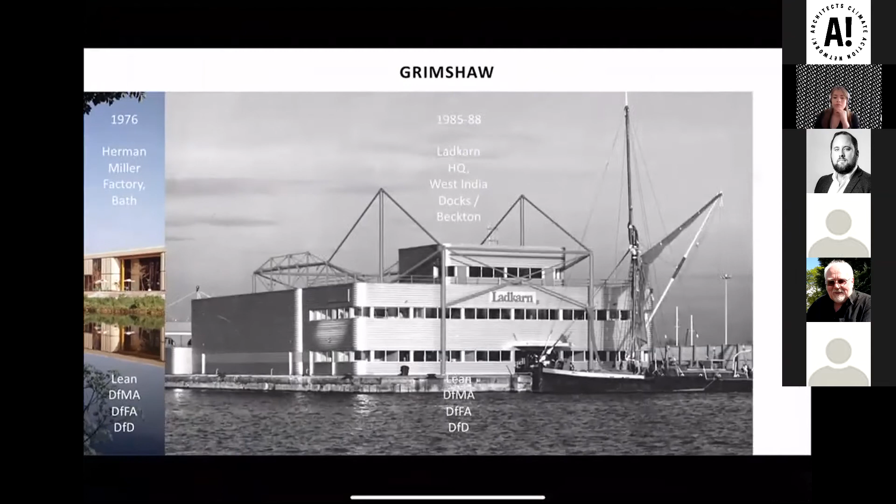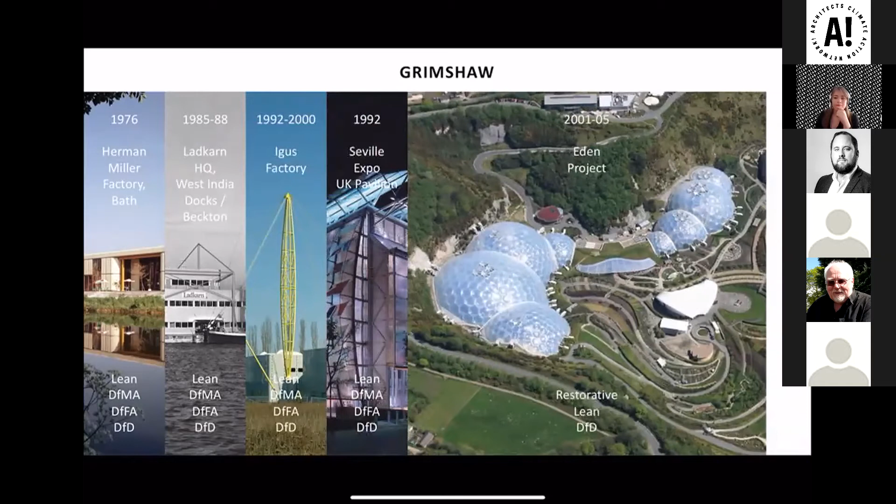We actually have quite a long history of implementing principles which are now highly aligned with circularity throughout the practice's history. Going back to the early days when Nick formed it with Terry Farrell back in the 70s, we started to look at projects that were highly adaptable and flexible. The context at the time was resource efficiency, particularly around things like the energy crisis in the early 70s. That thinking has come back to the fore in the work we do now, particularly in the context of the climate emergency, trying to decarbonise buildings. They're all strategies that lend themselves very well to those sorts of endeavours.

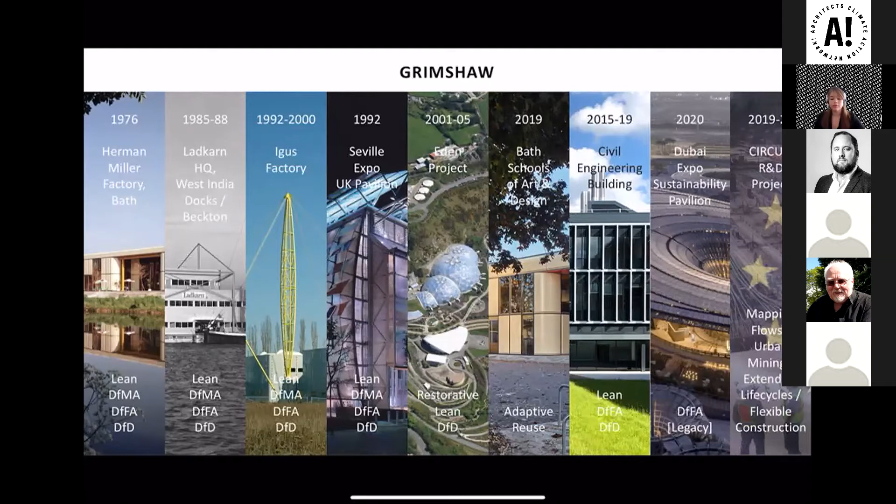So we've got a long history, and we're starting to formalise that knowledge we've gained over the decades, and we're starting to collaborate now in research projects. I've captured four projects, well actually three projects, two of them linked here, which I want to take you through, covering design for flexibility and adaptability, adaptive reuse, design for deconstruction, and urban mining. I'm going to take you through the lessons we've learned and the challenges we face.

So the first project is the Herman Miller factory in Bath, which has recently been converted into the Bath School of Art and Design. Back in 2019, the building opened.

The project was really interesting from the point of view of the journey that Nick has taken with this project, having worked on it originally almost 40 years ago at the beginning of the practice's inception, and seeing all of the strategies and principles around flexibility and hyper adaptability of the building actually being played out in the real world in our modern times. Nick was very involved in this project with Bath Spa, actually helping to guide them through the process of adapting the building.

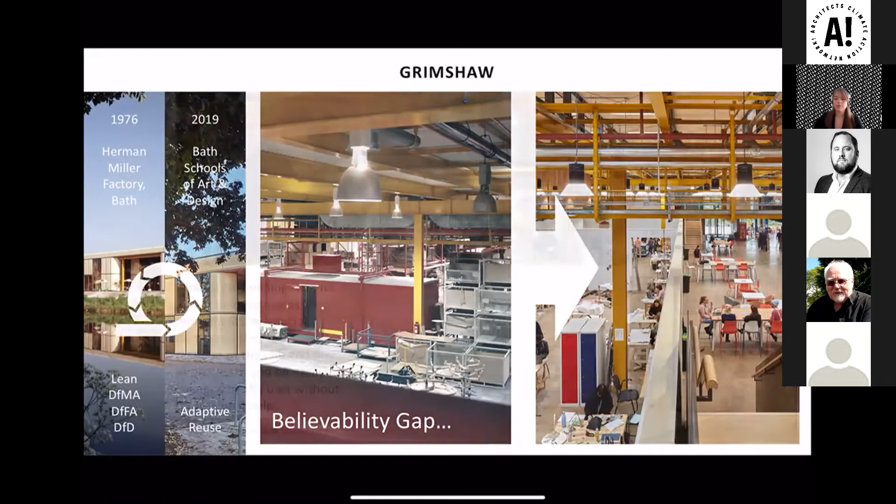One of the first challenges we faced, which wasn't necessarily a construction challenge, but a challenge to actually getting the project off the ground, was what he deemed the believability gap. This was actually convincing the client that this building was the right one for them, and that it was going to enhance what the school was trying to achieve, as opposed to becoming a barrier to what they wanted to do. So he took them back to the first principles of the Herman Miller factory, working with the client there to develop the brief.

Nick was quoted back in 1977 saying industrial buildings can no longer be designed as monuments for special purposes. They must respond to the ebbs and flows of processes and be easily changed by their users without professional help.

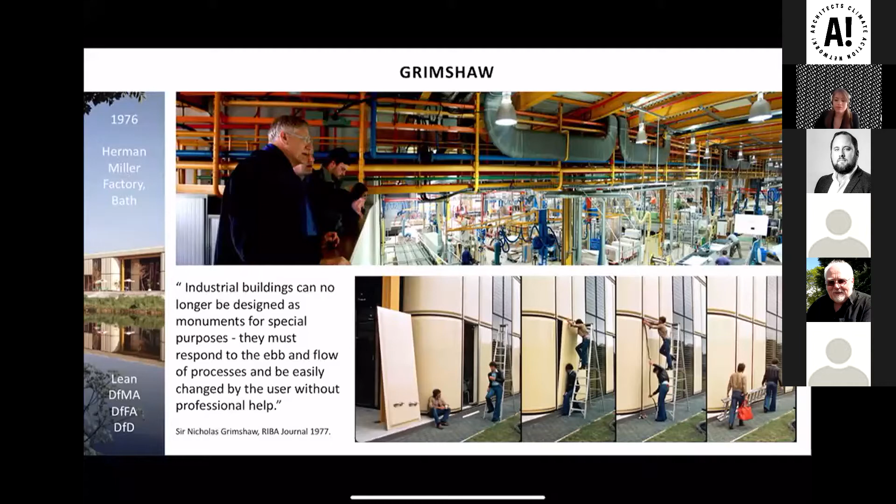You can see some rather kitsch images here of guys in flares back in the 1970s taking panels off the facade of the Herman Miller building over a cup of tea, just to demonstrate the simplicity of the systems involved and the process of swapping panels around at the time. That was really what the client needed to hear to be convinced this was the scheme and building for them to develop.

We've retained the entirety of the structure of the building with some modifications. The primary structure is made of steel. We've elevated the roof using steel trusses that follow the same grid spacing as the original structure.

This has allowed us to do a number of things. We've been able to create a service zone which services an upper deck. Originally, the Herman Miller building was used primarily as a large double height space with offices inserted around the perimeter. This allowed the school to create an actual complete first floor.

By elevating the roof, we've been able to get daylight and servicing all provided from above into this deep plan building. That's really helped us retain the future flexibility of the scheme going into the next 30 to 40 years, even longer.

That was really key to the design of the Bath School of Art and Design, making sure we retained that original premise of the Herman Miller building, which was to maximise the flexibility.

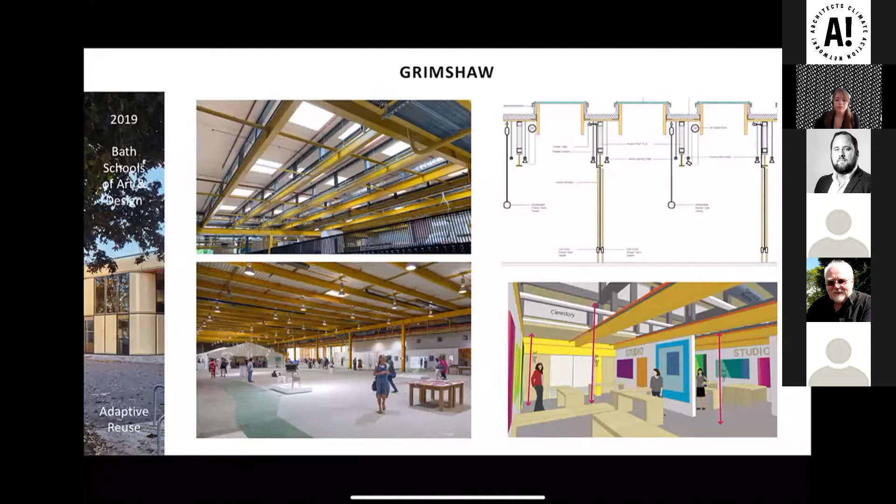One of the other challenging things with the scheme was that it wasn't quite large enough to accommodate the School of Art and Design. So there was a need for a pavilion to be put on top of the building for lecture theatres and some larger collaborative spaces.

In order to achieve this, we decided rather than trying to interface between the old and new structure, to completely separate them. So the pavilion is completely self-supporting. It has a truss structure that penetrates through the roof and goes down into the slab.

We've locally created new pad foundations to support this deck. This simplifies things greatly, in that the only interface between the old and new building is a deflection head that runs along the base of the curtain wall, where the roof deck meets the curtain wall. In terms of challenges and practicality, that really helped drive an efficient solution for the building.

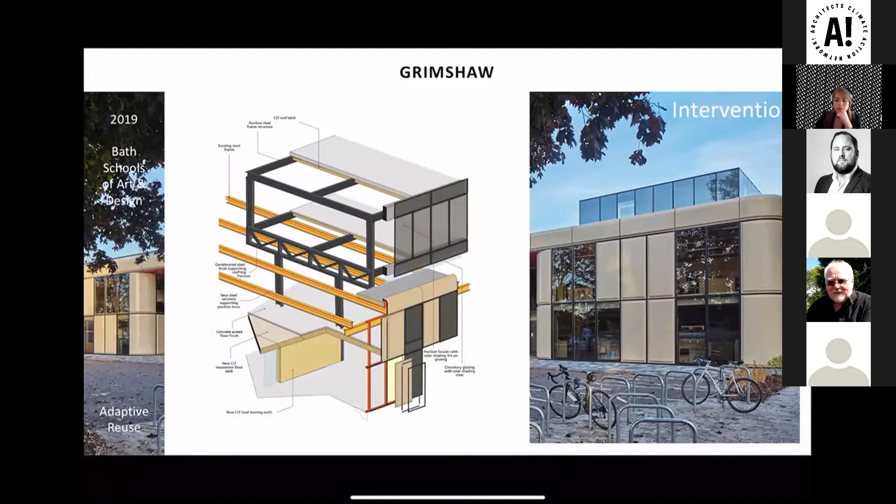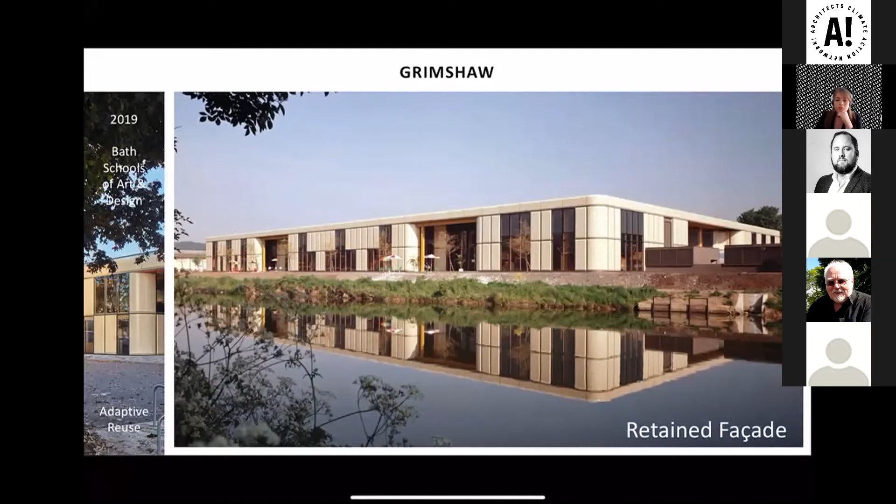In terms of the envelope of the building, the scheme had actually been listed prior to the school acquiring it, and that Grade 2 listing brought some challenges to the project in trying to keep to the original aesthetic of the building, working closely with the planners and the Heritage Board to make sure everything we did for the needs of the school would still reflect the original aesthetic of the building.

This involved a lot of forensic analysis of the facade panels, making sure we categorised them, left those which could remain essentially untouched, and identified those most in need of repair. These panels themselves are GRP panels with an integrated foam core.

They're fitted into the curtain wall system in such a way that they can be taken out and swapped for window panels. The idea was that Herman Miller could make modifications and move perimeter spaces around as they saw fit, and that's something the university wanted to retain as a functionality and actually wanted to implement.

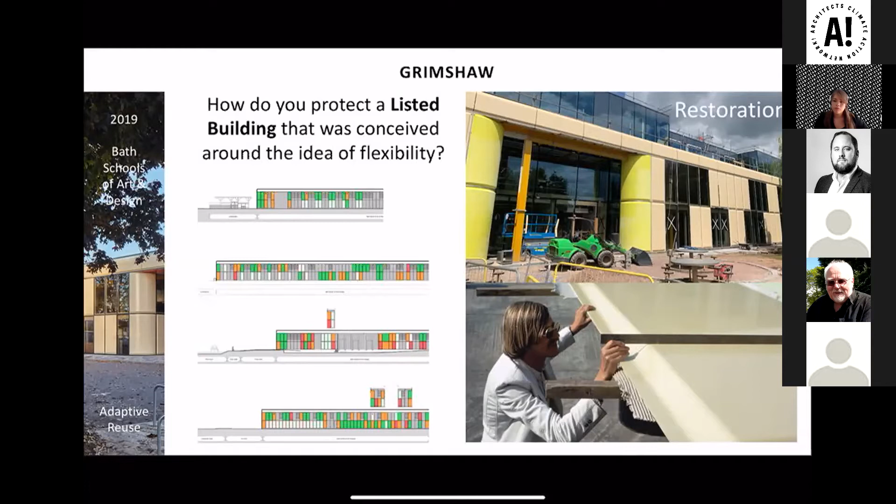We were able to, by working with our facade engineer, retain the same profile for the glazing capture system and accommodate a double glazed unit in lieu of the single pane that had been installed originally for the scheme. We were also then able to connect an internal lining that could be modified to be an acoustic panel, a pin board,

or a ply sheet for flexibility internally within the scheme. And in doing that, we were able to upgrade the thermal performance of those solid panels as well by integrating insulation behind the GRP panels. But in doing all of this, we've still retained the ability to disassemble and demount these internal and external panels, so there's still the ability for the school to move windows and solid panels around.

And there's scope as well internally to change the lining to suit the purposes going on behind the facade. There's a note here in terms of missed opportunities - there were conversations around whether the framing system, GRP panels, and gaskets should have had a complete upgrade. But I think the balance was struck, particularly in light of it being a heritage scheme, that we managed to keep the original scheme, swapping out what was absolutely necessary, and finding that balance was essential to the success of the scheme.

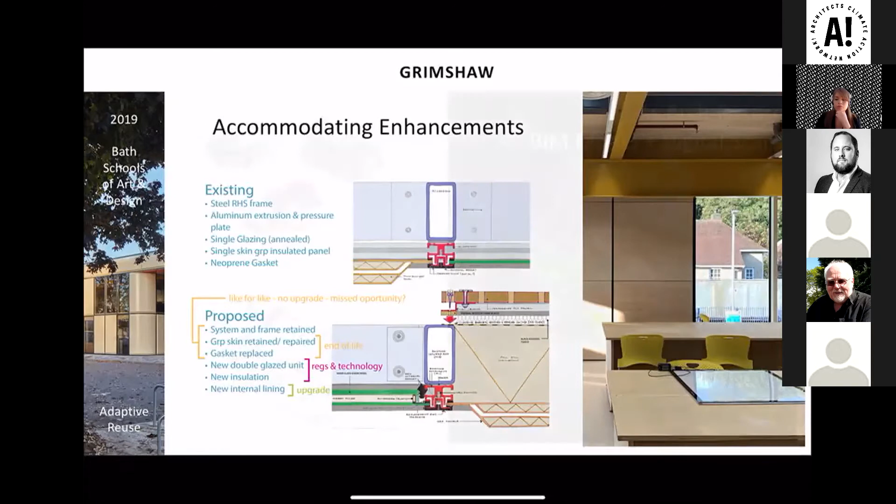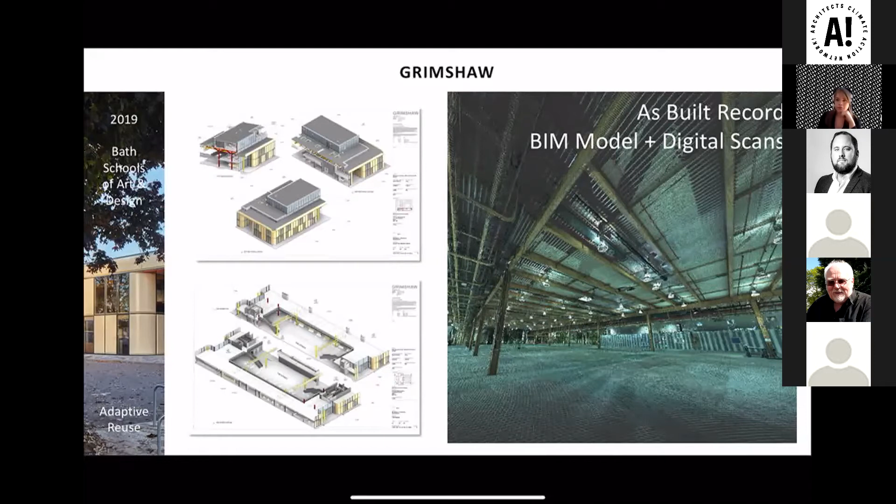So just to conclude on the Bath School of Art and Design, in terms of the digital information we provided at the end of construction and handover - before the school took on the project, there were only archival drawings that were hand drawn. So we've provided a digital model to the facilities team at the university, along with digital scans of all the original building elements. Although this wasn't to BIM level 2 compliance, which wasn't a requirement of the scheme, there is certainly enough information here organised in such a fashion that it would be very easy to convert this into a sort of digital twin for the building at a later date. So that concludes the Bath School.

Moving on to the civil engineering building. This project commenced in 2015 with our commission to develop a master plan to move the engineering department at Cambridge University over to a new site. The Department of Engineering were very active in developing a brief for the project. They were very keen to develop their own sustainability agenda.

Two of the points I've highlighted here are minimising whole life energy and maximising flexibility and adaptability. That was both across the master plan, because they didn't have a programme for delivering all the phases of the building at that point in time, so they needed flexibility depending on when finances came in. But also that flexibility is intrinsic in developing strategies such as design for deconstruction, and that plays into ultimately reducing whole life energy within the building and whole life carbon. So those had an interplay between them.

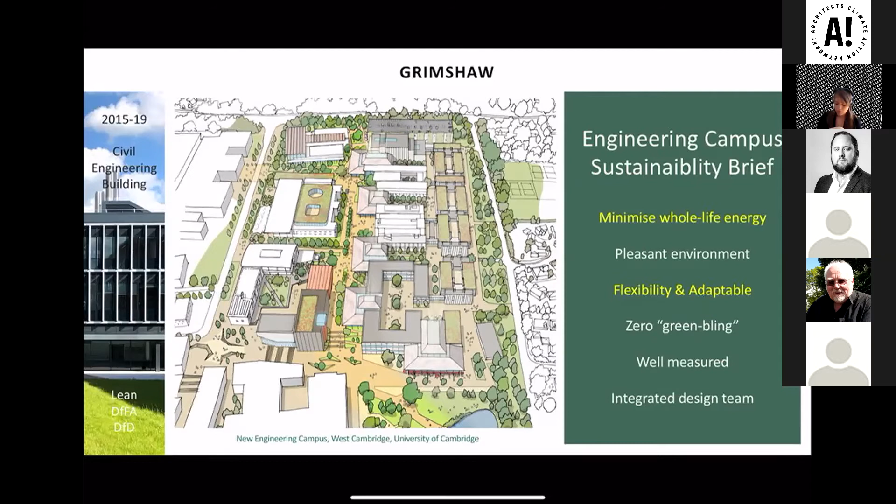So the strategies for the building we looked at implementing were, first of all, lean construction through a modularized approach to developing the planning grid and structural grid for the building, so that we had as many similar components as possible. We minimized the number of special components that needed to be fabricated, and we minimized the need for fabricating bespoke components.

We also looked at trying to increase upfront the amount of penetrations placed within the structure, so that we didn't have to come back at a later date and put future penetrations in. We tried to coordinate as much of the MEP services with the future need for MEP as the building grew. The diagram at the top right hand corner shows a potential strategy for the building growing over time.

One of the things we implemented early on in the layout of the building was to put the service cores - the stairs, toilets and risers - to the gable ends of the building in order to help minimise disruption in the future when future phases came online. By doing that, and also by making sure the gable end facades were a simple rain screen cassette system that could be demounted, stored, and potentially re-installed on future phases of the building, we were really looking to maximise the interplay between design for deconstruction thinking and flexibility in one strategy.

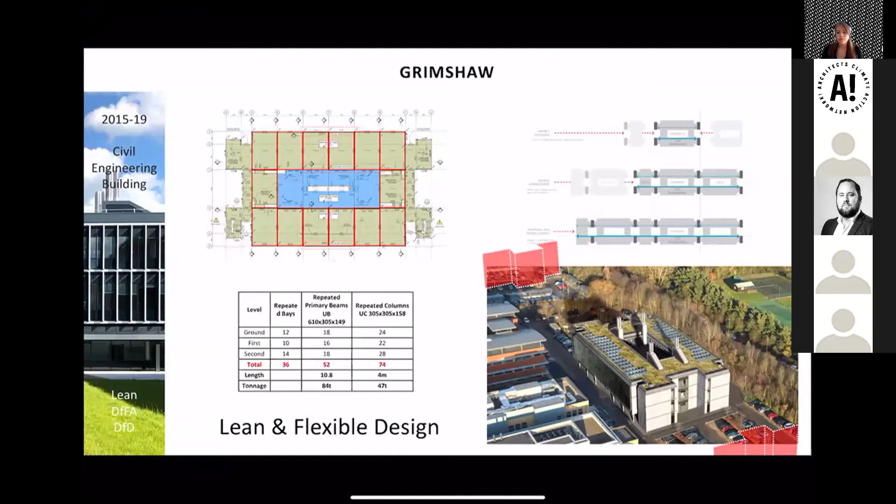We also then looked initially at trying to maximise design for deconstruction across the entire project.

So we actually looked at having a completely demountable primary steel structure and floor slab. We worked with our structural engineers, Ramboll, based in Cambridge, and initially we worked through a solution whereby we had a bespoke precast concrete slab with bolted connections back to the frame and also to create rigidity between the slabs. We initially had good feedback when we approached the market.

We identified that we needed to approach them early on in order to get their engagement. But when the project was tendered and the contractor came on board with their team and they started to really interrogate the market, we realised quite quickly that the market wasn't really in a position or had the appetite to want to take on bespoke precast planks.

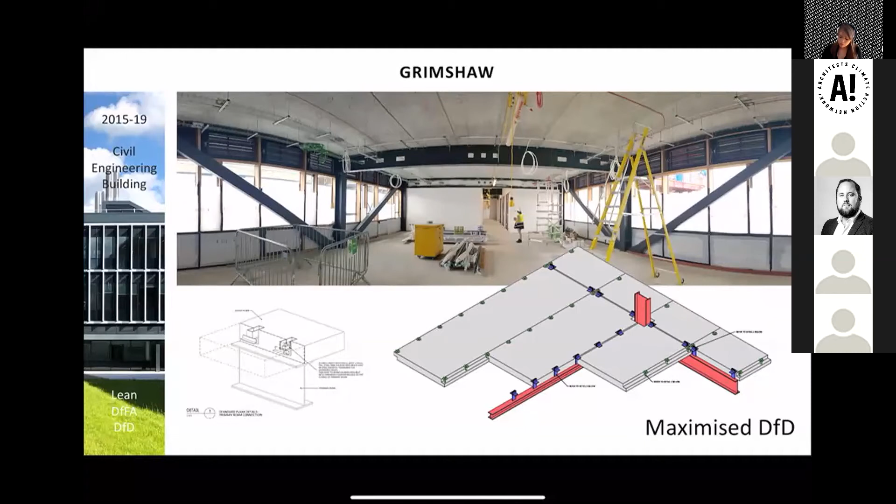So instead, we decided to shift our focus away to a more standard precast hollow core plank solution, but then focusing on the detailing of the steel frame in order to maximise the potential for design for deconstruction of the steel frame itself. So we looked at ensuring that bolted connections between columns and beams were easily accessible and weren't coated with intumescent paint or other coatings that would inhibit the ability to debolt them.

Instead, we opted for infill panels of fireboard or acoustic boarding, depending on the acoustic and fire requirements of the different subdivisions between rooms in the building. By using that strategy, we managed to make it as easy as possible to deconstruct the beams from the columns.

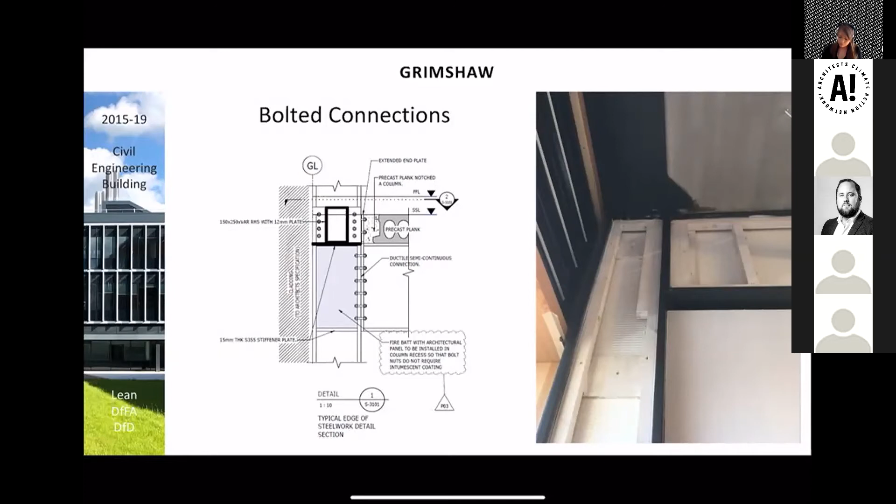We also looked at where the interfaces were between the hollow core planks and the structure itself, opportunities for debolting those connections from the beams so that we could get access and keep the steel intact to maximise the amount of steel that could be retained.

I think the numbers are something around 140 tonnes of steel constitute the primary structure, which is about 50% of the total steel in the building, if you account for rebar in the concrete in the slab. So there's a huge potential there for reuse, and obviously then that's a residual asset within the building that can be accounted for within our carbon accounting.

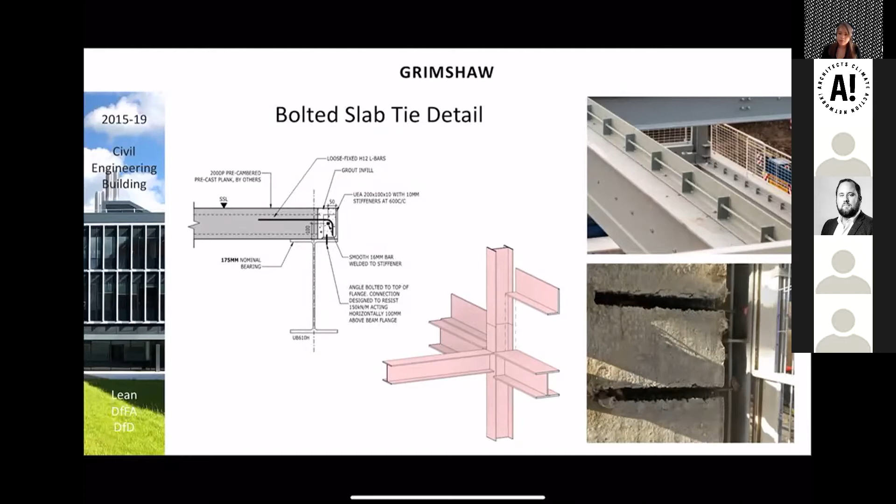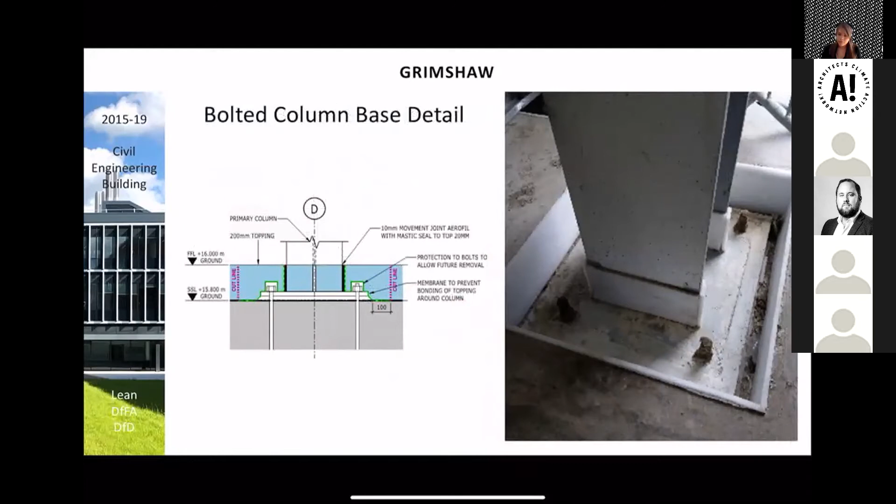And you can see here just the final detail showing some forethought around connection details within the slab to the column bases, making sure again that it's easy to break away the screed so that you can get access to the bolts. And just as a final point, all of this is sort of meaningless if you don't have sufficient documentation and retained knowledge within the client body.

To be able to implement any of these strategies that we've built into the construction, we looked at initially tagging all of the steel work with data from the BIM model. The project's working to a BIM level 2 compliance.

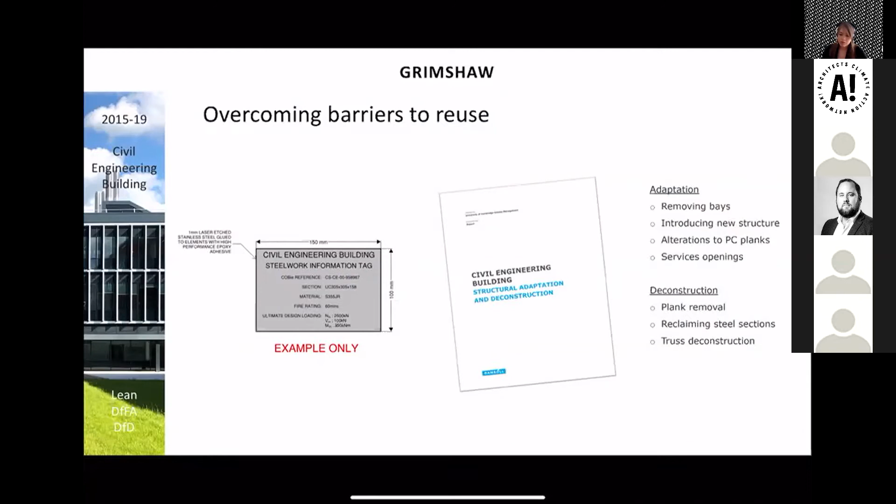That didn't actually make it into the final scheme, but we did have a comprehensive write-up by Ramboll, who were looking to create a handover document to the client so they understood all of the strategies and all the connection requirements and limitations of the scheme that they could work with in the future.

We couldn't take all of those things forward, but there are many people that are based within the building. There's the UK Collaboratorium for Research on Infrastructure and Cities, who actually were the catalyst for the building's finances, and the department itself, who is obviously an owner-occupier.

They have a real desire to take this forward as a living laboratory and try to see all of these things that we've implemented seen through to fruition. So we're still working with them even after handover.

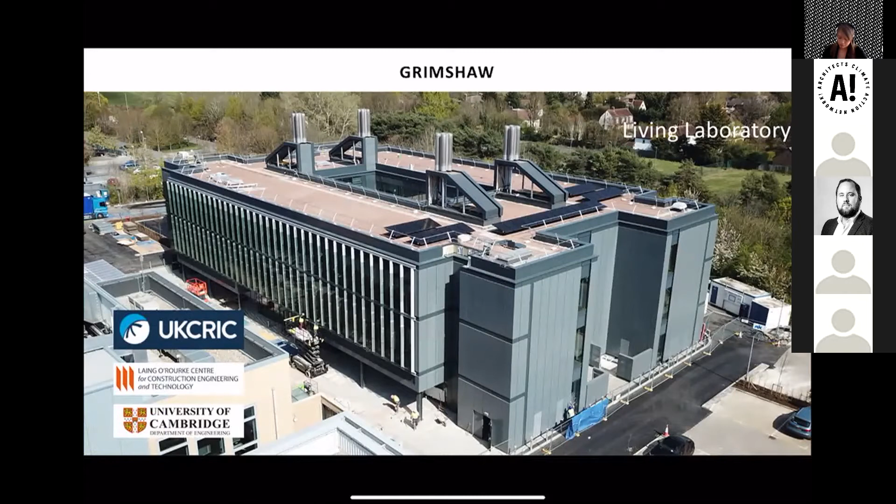The last project I wanted to talk about was the Circuit project, which is the Circular Construction in Regenerative Cities R&D project funded by the EU, which we are a member of, working with ReLondon, which was formerly LWARB, BRE, Green Building Council and Greater London Authority. We're a collaborative group working with 3 other cities across the EU.

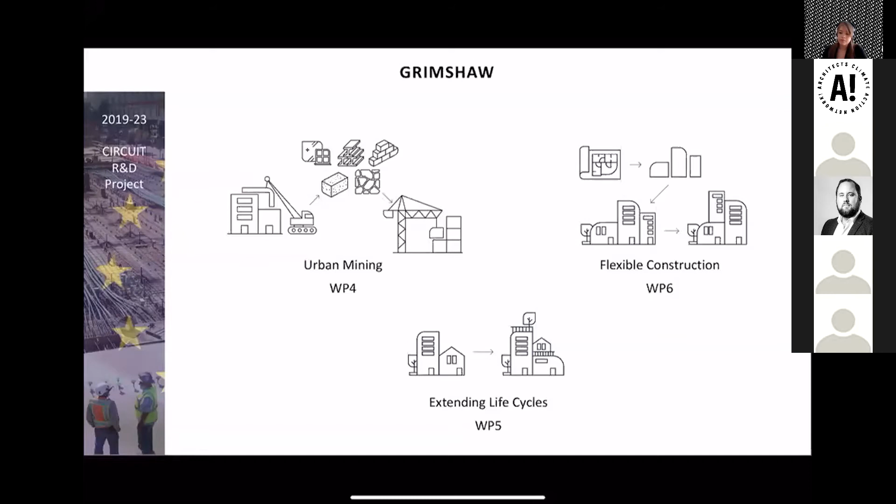We're really looking at specifically urban mining of materials within the city, flexible construction in terms of design for deconstruction, and looking at extending life cycles, so this is adaptive reuse and retrofit. Those are components that are identified as key work packages to develop demonstrator projects in order to demonstrate to the market and to potential clients that these were things that could be implemented within their projects.

One particular project that I just wanted to highlight before I finish is a timber reuse project, which is a demonstrator within the Circuit project.

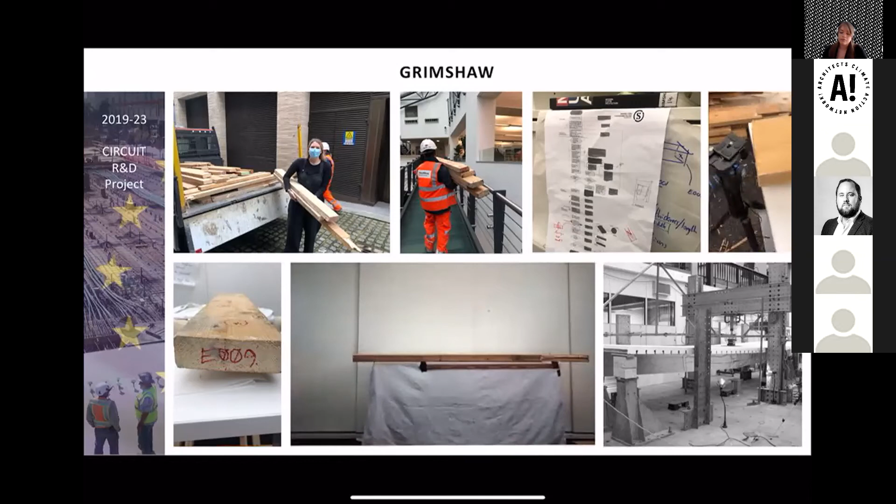This is where we're rolling our sleeves up and getting our hands dirty to demonstrate to the supply chain that you can take secondary timber from a demolition site. You can see here my colleague Annabelle collecting timber from her site, testing it, and sorting it into different grades. That timber is then sent to a fabricator in Devon, who completes a glulam beam and column configuration, which is sent to the BRE to be tested in their lab and certified for use on a construction site.

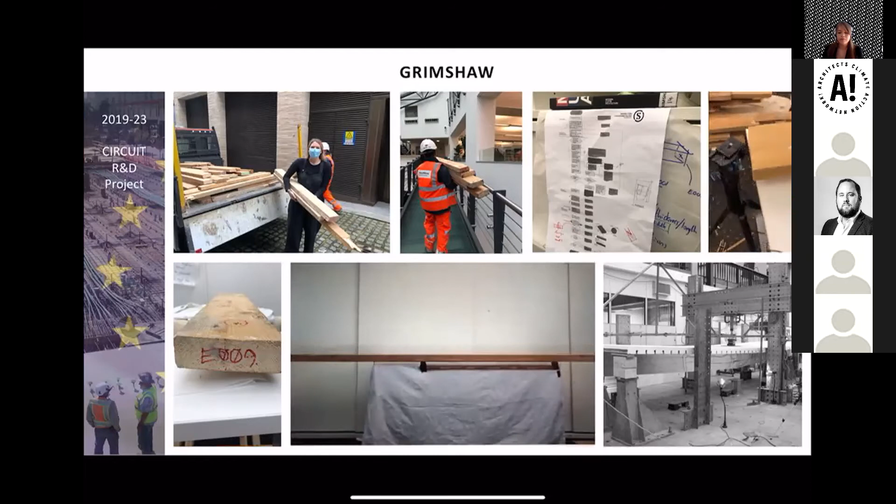By doing that, we're really pleased to be involved in a project where we can demonstrate to the supply chain that these things are possible. I'll end there. If you want more information about Circuit, there's lots of workshops coming over the next couple of years where we're disseminating all this knowledge and the lessons we've learned.

Thank you very much, and apologies for slightly overrunning.

That's great, Peter. Thank you so much. It's brilliant to see the longevity of some of those ideas and principles, and the current examples too. That's really exciting to see.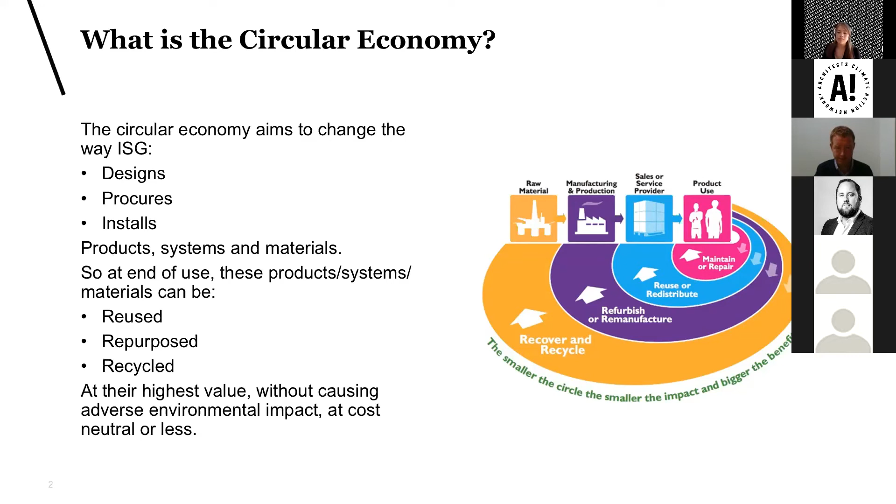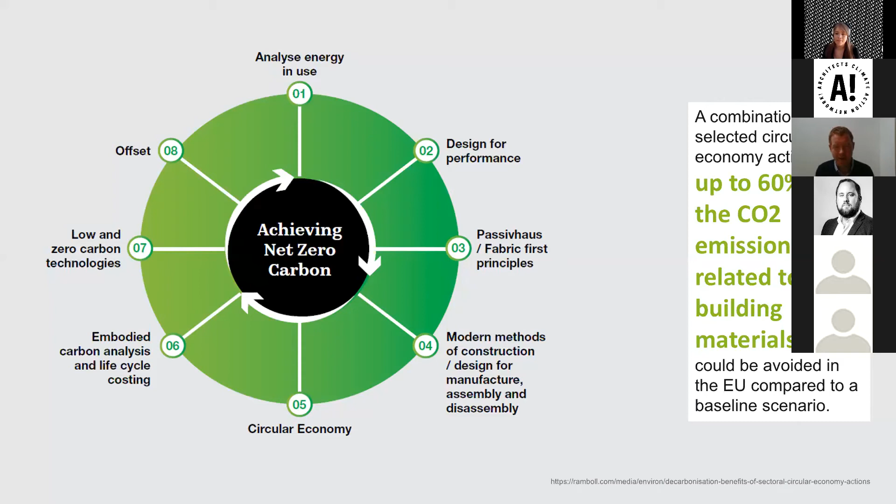So that's what we're trying to achieve in the coming months and years at ISG. This next slide really ties into our approach on net zero carbon. You can see here that number 5 is our approach in terms of tying in with those other design standards and design issues that we think form the core of what a building should be designed to when trying to achieve net zero carbon. So a fundamental element of the carbon agenda as well.

Next slide please. This is to give you a brief overview of our timeline, and referring back to our definition, you can see that we're taking that slightly further, referring to a lot of the things Peter discussed - design for manufacturing, assembly and disassembly. We must make sure we get the D in there. That's often missed and discounted. So if we can design something to be assembled, we should be able to design it to be disassembled.

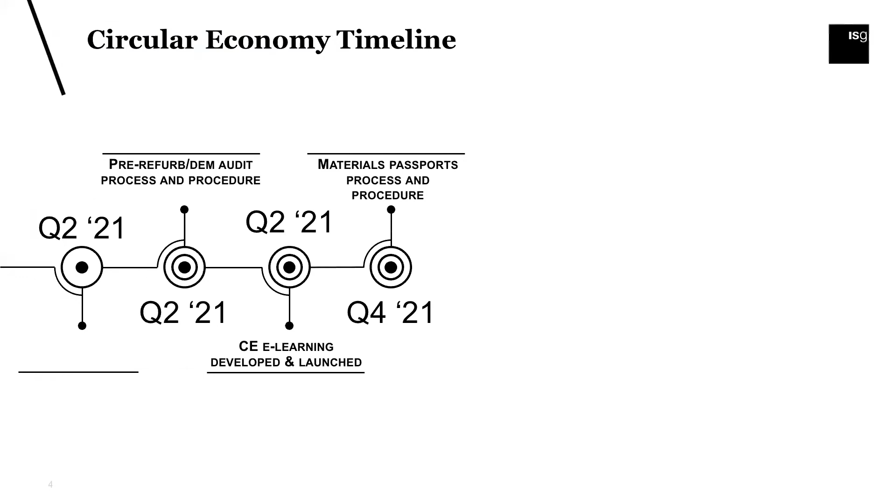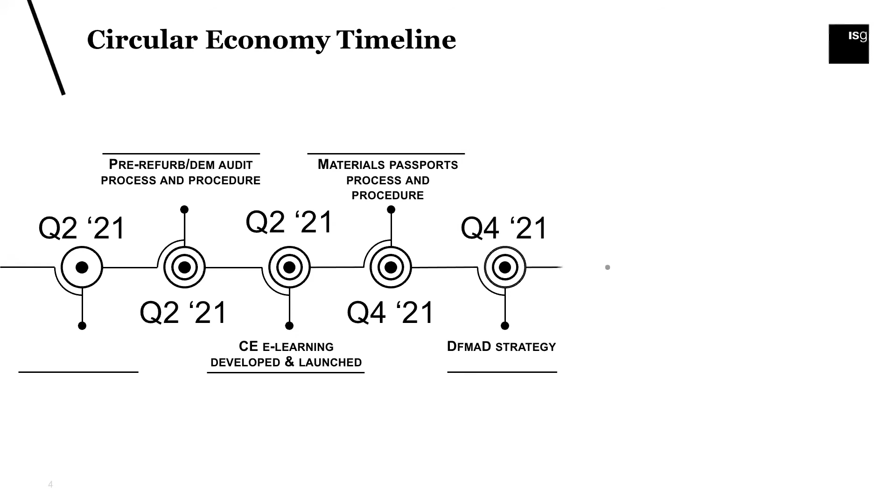We've got materials passports that we're trying to develop. We've got a really good reuse strategy going, which we're going to come on to talk about now in a minute. And again, I think we can learn a lot from what Peter talked about earlier around those issues of designing for longevity, adaptation, flexibility, etc. So it's great that there are so many really good case studies out there already that we can look at and try to adapt. Next slide please.

So the building I'm going to talk about, you may have heard of, has been publicised very recently - the Entopia Building. Funnily enough, again, for Cambridge University, for the Cambridge Institute of Sustainability Leadership. So this is going to be their new home. It's number 1 Regent Street in Cambridge. It's a 1920s former telephone exchange, and the previous tenant was the Cambridge Assessment Centre.

So we're literally on site at the minute. It's going to stay as an office block, but highly sustainable. We're going for EnerPHit. It should be the largest office structure converted into an EnerPHit building. It's going to be BREEAM Outstanding, WELL Gold with an aspiration for Platinum. We've got bio-based targets, embodied carbon targets, and of course, what I'm going to talk about - options for adapting and implementing circular economy principles. Next slide please.

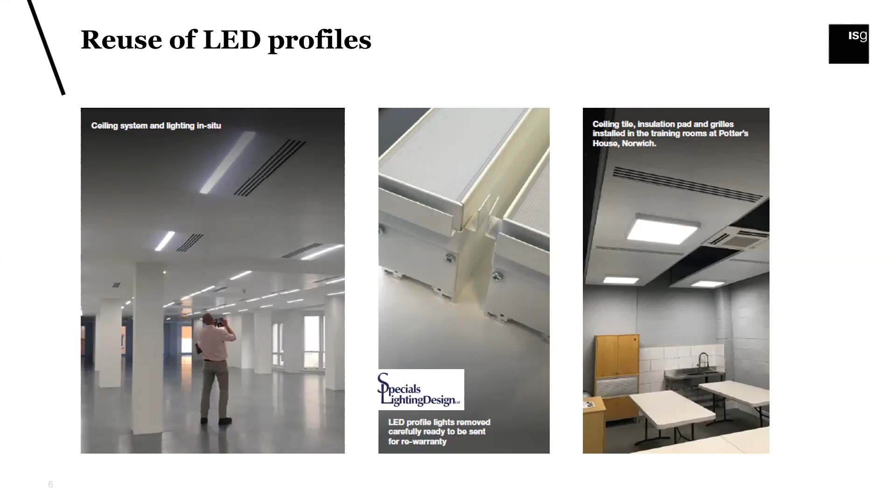So the next thing we've been looking at is the electrical equipment. We were lucky that a lot of the electrical equipment on this project was in very good condition and had been well maintained, which allowed us to retain and repurpose as much of it as possible.

This is a really great example of a client willing to listen to the experts who say there really isn't anything wrong with this equipment. It's been well maintained, well looked after, it's good quality kit, and there's no reason why it should be replaced.

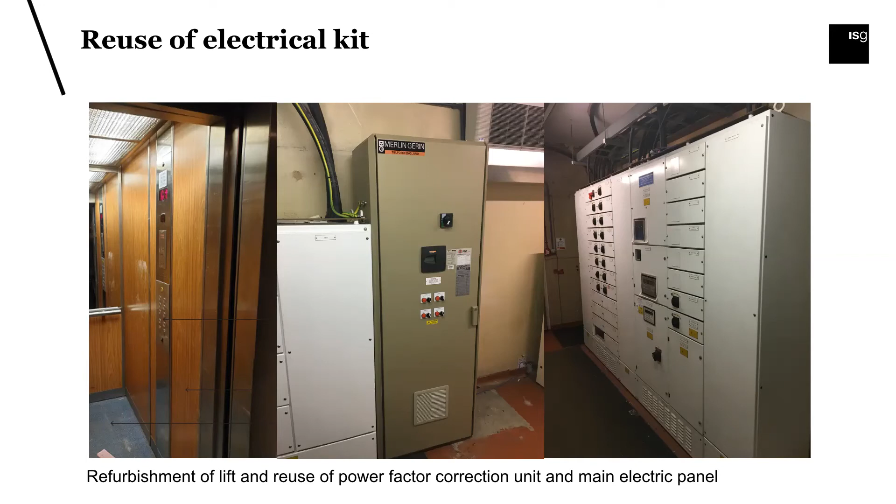We've also got a PV canopy up on the roof, and unbeknownst to the client, through the UK GBC, we've known Cleveland Steel for some time. So I contacted Roy Fishwick and said we've got this PV canopy on the roof - have you got any steel that might work? And of course he said, no problem at all, Pete - if you give me enough time, I can find the steel that will work for this PV canopy.

You can see on the right some rusty looking steel lying around on the ground - that steel actually hasn't been used. It's a bit dinged and dented from being moved about with forklift trucks, and was heading for the scrapyard. The cost of steel is pretty high at the minute, so we've agreed that steel will be reclaimed, shot blasted, and galvanized for use on the PV canopy. We're estimating up to 90% of that PV canopy will now be reused steel, which will really help contribute towards the embodied carbon we've got to meet on PC.

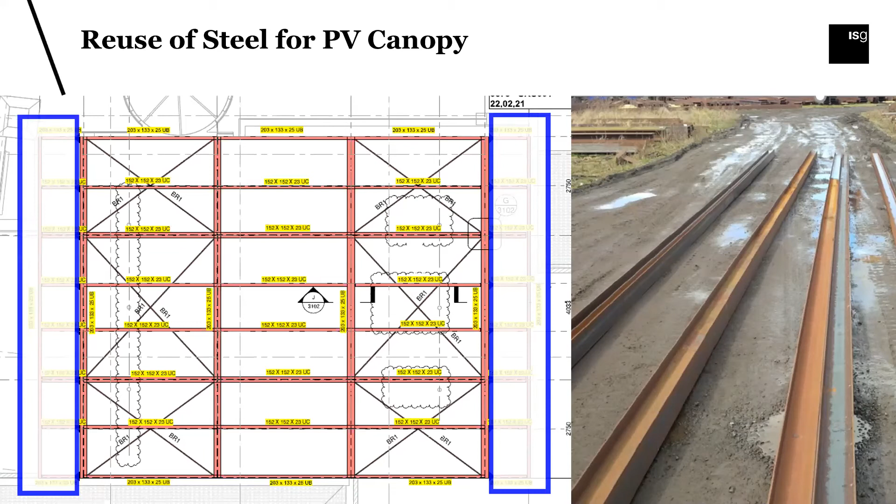Next slide, please. So I thought I'd leave the best to last for an architectural audience. I'm not sure if there's anyone here from PSE & Co, but we're currently about to start the refurbishment and fit out of 30 Berners Street in central London for Netflix, which will be their new headquarters.

Unfortunately, they're redesigning the reception area and don't have any use for the reception desk. This particular reception desk was designed by PSE & Co.

It has very beautiful leatherwork that was designed and installed by Bill Amberg Studio, and it was installed by Benchmark Joinery. So we've currently got Benchmark on one of our projects in London. So I contacted them and said, can you meet me on site? We need an opportunity to look at this beautiful reception desk.

And see how we might repurpose it at Cambridge. So we met last week. Luckily, the design is quite straightforward in terms of the carcassing. The only real issue will be the stone top, which comes in two large pieces and has been glued to the structure.

So we have to see how that will come apart when we try and get it off. If it does break, then Benchmark have priced to provide the same oak timber as a worktop to match in with the existing structure. But hopefully it'll work. Obviously, a very beautiful piece of stonework has come from Italy, and hopefully it will all work together.

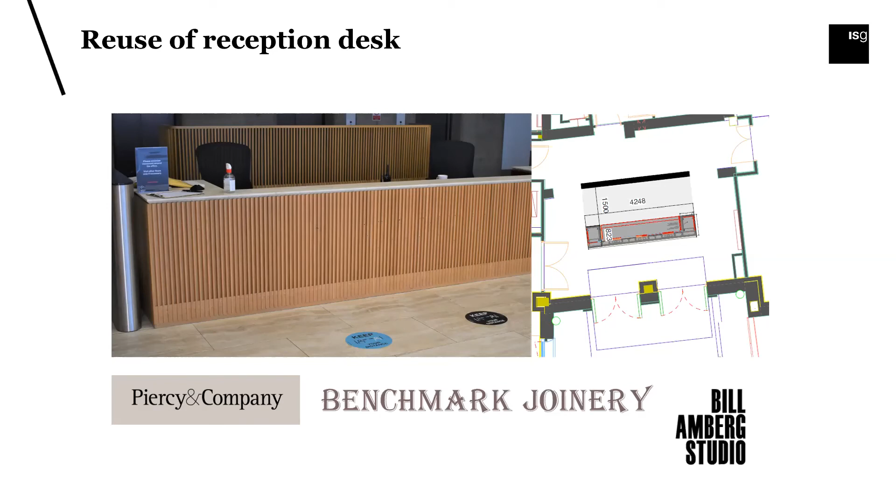So next slide, please. I just wanted to finish off by saying one of the things that's so important with circular economy is making sure that you collaborate. We can't do this by ourselves, and I think Peter made that point too, with the amount of different consultants and different teams you have to work with to make this right.

From a construction perspective, we've got manufacturers that are often doing take-back schemes now that we work quite hand in glove with. There are lots of different circular economy partners that we use to try and reuse as many of the furniture, the light fittings, the raised access floor, you name it. When we go into a Cat B office to refurbish it, we try and make sure that as much of that material is reused.

In particular, Whitecroft and Signify are doing some really great stuff around the circular economy, 3D printed lighting, and Whitecroft with their ability to remanufacture, regardless of the original manufacturer, they can usually match their product into existing lighting systems to allow for those to be re-upgraded in the future.

And then really on site, we try and, again, make sure that as much of our materials go back in terms of those packaging elements, and then what can't be goes off to local charities where they can be reused. So that's it from me. Just a very whistle-stop tour of that particular project, and I'd welcome any questions.